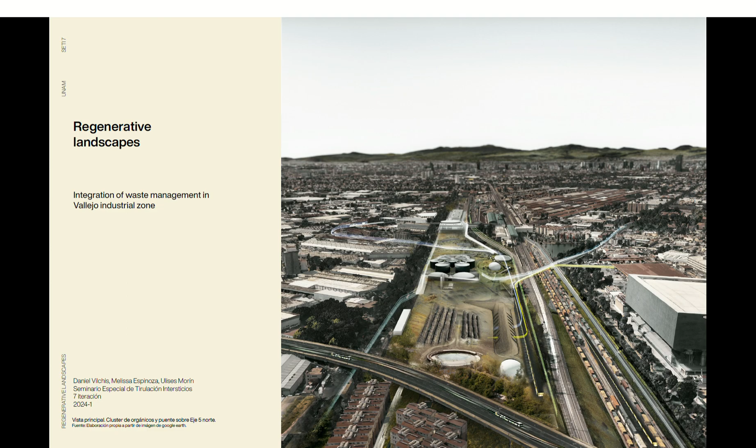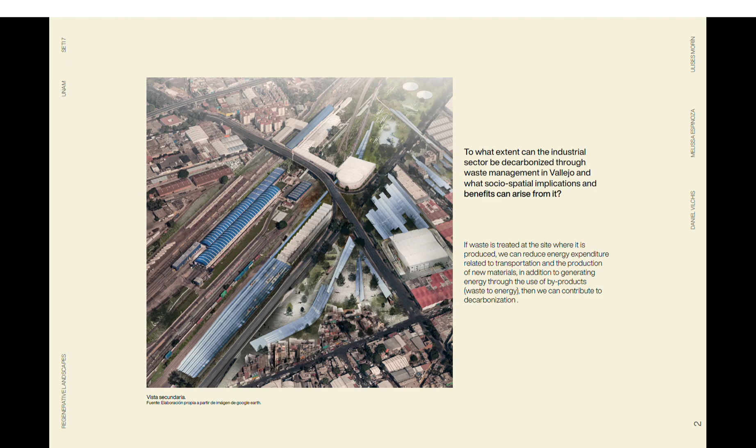Our project is entitled Regenerative Landscapes, Integration of Waste Management in Vallejo Industrial Zone. Our project focuses on speculating on a new waste system which aims to reframe the pejorative basis which waste historically holds. That being said, our research question reads as follows. To what extent can the industrial sector be decarbonized through waste management in Vallejo, and what socio-spatial implications and benefits can arise from it? Our hypothesis is based upon stopping waste courses to landfills. This action is done in order to obtain either prime matter, energy, or to reduce greenhouse gas emissions.

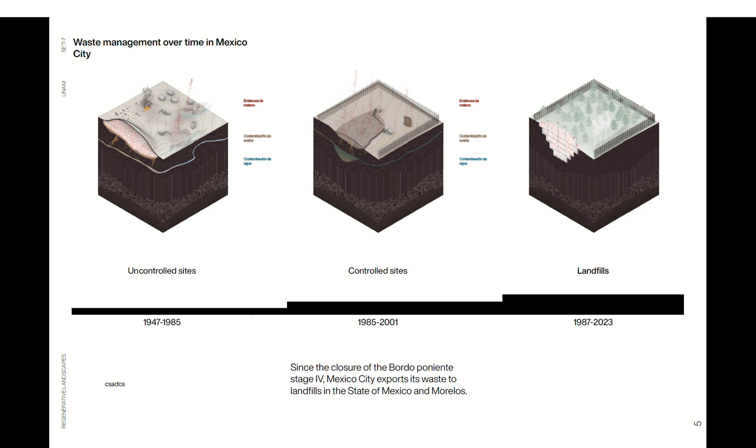In order to contextualize Mexico City's current situation, we're going to talk about the evolution of waste management in the capital, which relies on three phases. Firstly, uncontrolled sites were used from colonial times until 1985. These sites present severe environmental damage. Secondly, there are controlled sites which emerged after the closure of uncontrolled sites and the 1985 earthquake. They also constitute the time when some leaders of informal recycling emerged. Even though the threat is lower, they still represent environmental damage. Lastly, we have landfills. Although they began being built in 1987 in the west part of the city, nowadays all the waste which isn't recycled travels to this type of site, located at the outskirts.

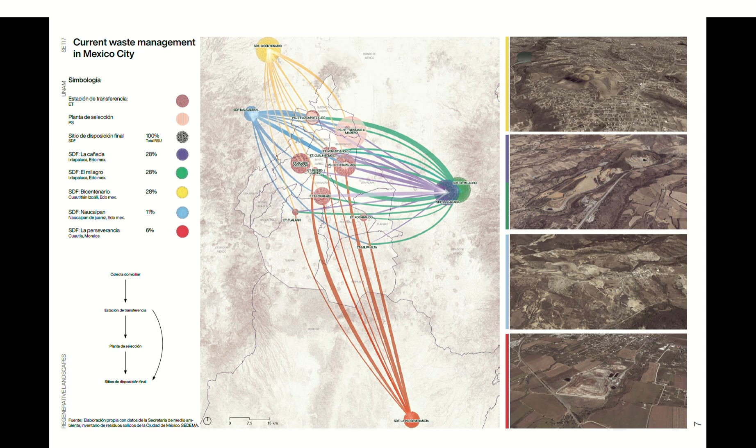In order to spatialize the Sankey diagram shown before, we made this map with the 5 landfills used by Mexico City. The first 3 are the busiest landfills, and 2 of them are used by Vallejo Industrial Zone, which are Naucalpan, Bicentenario, and La Cañada. This view focuses on Vallejo's landfills specifically. The price of disposing waste at these sites sums up to 115 million pesos annually, without taking transportation into account. In order to deal with the issue represented by waste, we look upon solutions which rely on the waste management system to obtain benefits, starting from informal recycling, industrial ecology, energy production, and landscaping possibilities derived from the regeneration of landfills.

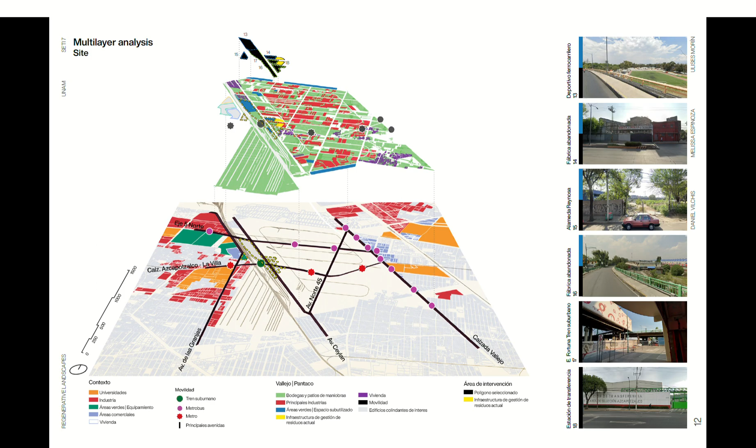For choosing a site inside the industrial zone of Vallejo, we first made a context analysis looking at public spaces such as commercial areas, parks, and universities, as well as the city's urban mobility network, industrial zones, and waste management infrastructure in Vallejo. Secondly, we analyzed the inside of Vallejo's industrial zone and identified warehouses and maneuvering yards in green, primary industries in red, and most importantly, abandoned and underused space in blue. Additionally, we identified some buildings across the railways that are of interest. We started to note an opportunity in an open area located between the roads, the mobility network, and the existing waste management infrastructure. Lastly, in order to obtain the area needed for implementing waste treatment infrastructure, we identified other underused spaces and warehouses close to the chosen site, which would allow us to connect the flows and the urban fabric.

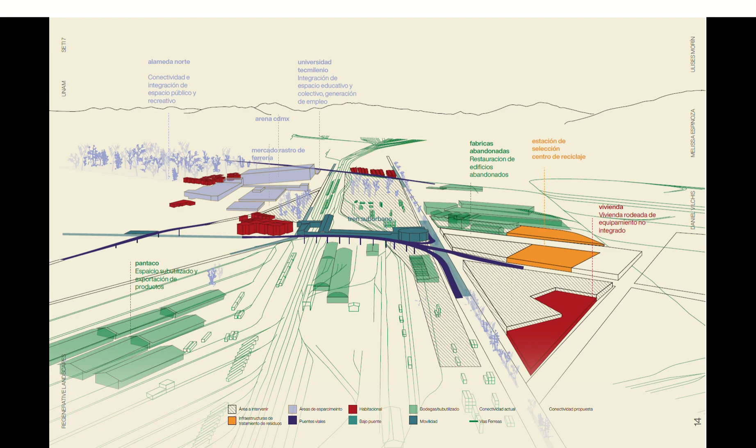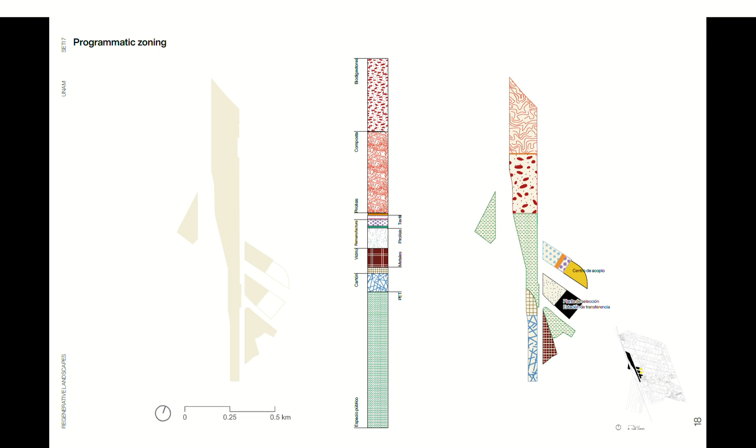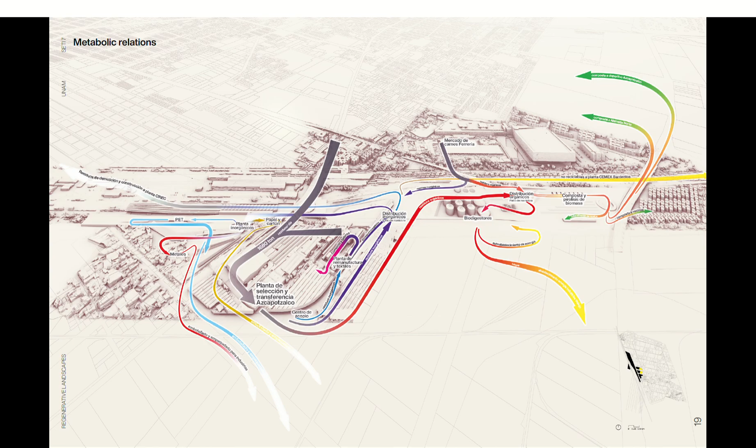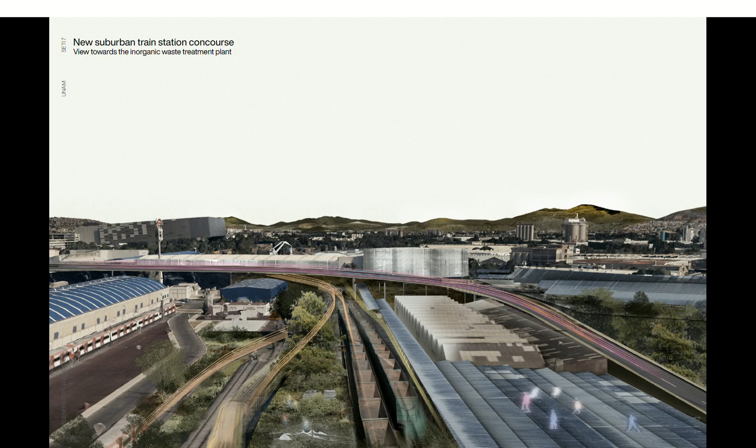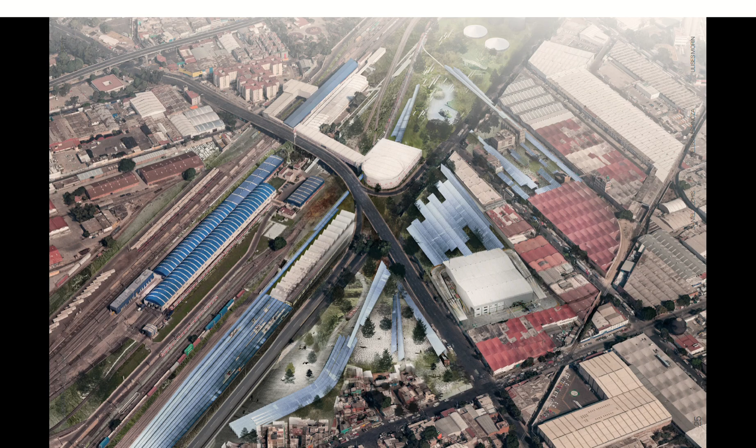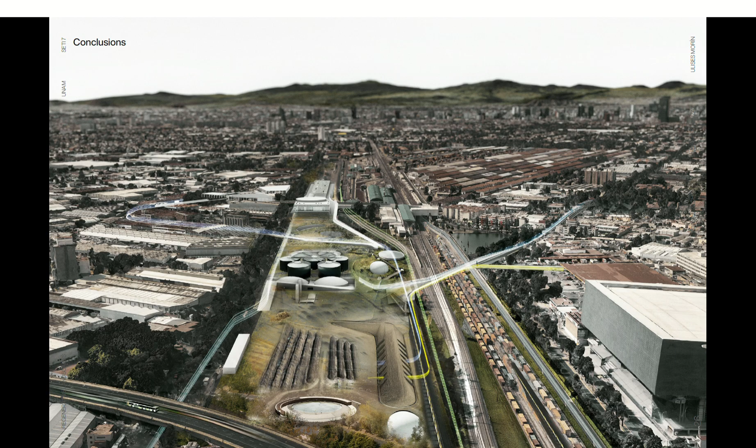We believe that waste management opens up an opportunity to contribute to the decarbonization of urban centers, introducing the right management and turning to people in order to create a structural change in society regarding waste.